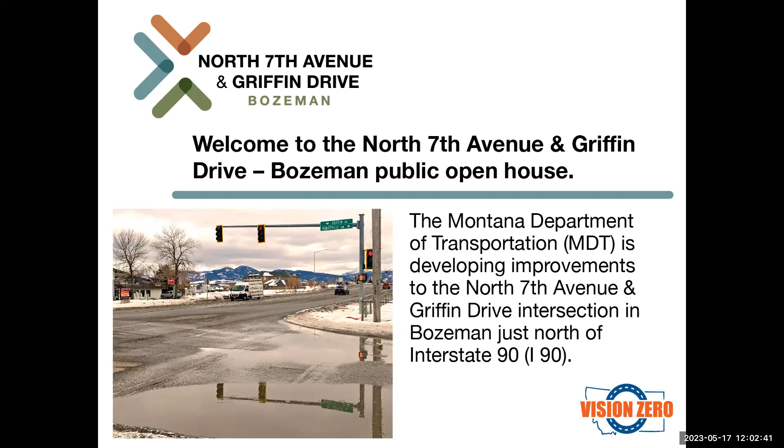Thank you. Hi, my name is Geno Liva, and I'm the Butte District Administrator for MDT. MDT's mission is to plan, build, operate, and maintain a safe and resilient transportation infrastructure to move Montana forward. MDT is looking forward to seeing the benefits provided by the North 7th Avenue and Griffin Drive project to the city of Bozeman and area commuters. We thank you for your participation in today's presentation, a question and answer session, and appreciate your interest and engagement in this project. Before we begin our presentation, let's begin with a quick round of introductions with our project team members.

Dave Cunningham. Hi, everybody. I'm Dave Cunningham. I'm with the Montana Department of Transportation, and I am the Butte District Construction Engineer.

Paul Cogley. Hi, my name is Paul Cogley, and I'm a constructability reviewer for MDT.

Josh McKenzie. Hi, my name is Josh McKenzie. I'm the project manager for CK May Excavating, the contractor on the project.

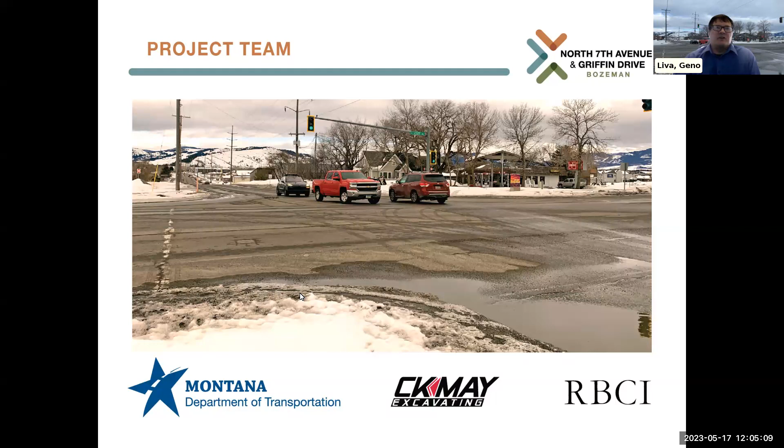Thanks, Geno. I appreciate that. The Montana Department of Transportation is making improvements to the busy intersection of North 7th Avenue and Griffin Drive, just north of Interstate 90 in Bozeman. The project includes reconstructing the intersection of North 7th Avenue, Griffin Drive, and Mandeville Lane. These improvements will reduce delays, improve traffic flow, and enhance safety features.

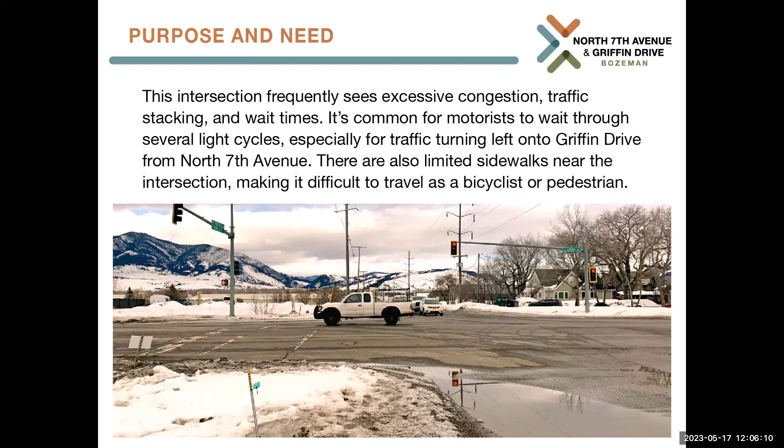In 2019, an average of 18,380 vehicles a day used this intersection. The intersection frequently sees excessive congestion, traffic stacking, and wait times. New turn lanes and other improvements will enhance traveler safety features while decreasing congestion and wait times. The project will also reduce long-term maintenance costs and improve pedestrian and bicycle mobility by adding sidewalks that connect to existing pathways.

Construction is anticipated to begin in early June 2023 and be substantially completed by later this fall. Reconstruction will involve adding new turn lanes, durable concrete pavement, ADA compliant sidewalks, bicycle accommodations, curb gutter and storm drainage, traffic signals and lighting. Additional work will include improving the approaches and relocating some utilities.

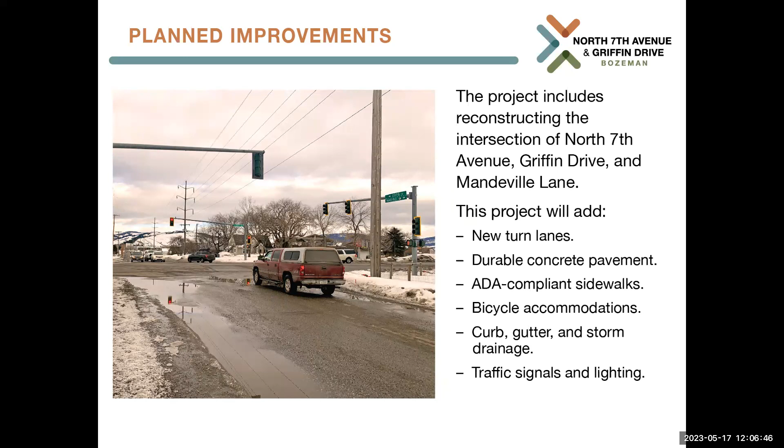A left turn lane will be added to North 7th Avenue in both north and southbound directions. A dual left turn lane will be installed for westbound traffic on Griffin Drive, turning south towards I-90. New turn lanes will help traffic move more efficiently and safely while increasing the capacity of this intersection.

Sidewalks have been planned according to the specific need of each leg of the intersection. Sidewalk will be added to both sides of North 7th Avenue, and a bike lane will be added on the east side of North 7th Avenue. The new facilities will extend to Wheat Drive and Nikles Drive.

A shared use path will be added on both sides of Griffin Drive. A 5-foot wide paved shoulder will be added to both sides of North 7th Avenue to accommodate bicycle or pedestrian traffic. On the east side of North 7th Avenue, a sidewalk will be added to connect to the existing sidewalk, and sidewalks will be added to both sides of Mandeville Lane to connect to the existing sidewalks. These additions will connect the existing pathways and sidewalks to improve mobility in the area for pedestrians and bicycles.

MDT has been communicating with city and county officials and area utilities to make certain these critical services will continue in the project area throughout construction. MDT has also met with emergency responders to ensure any potential emergencies in the area would be responded to in a safe and timely manner.

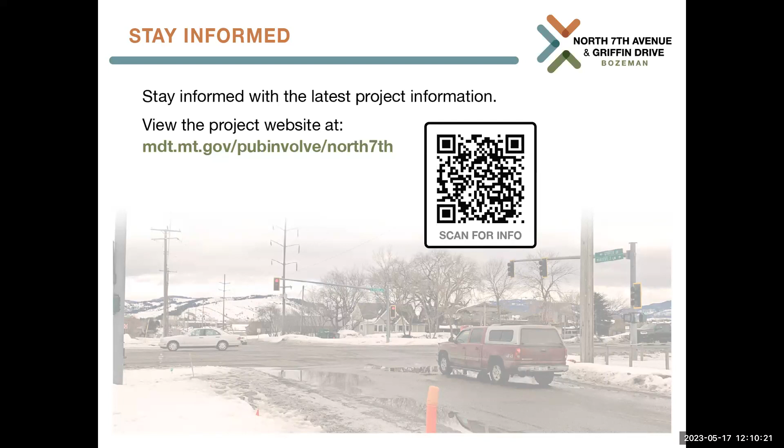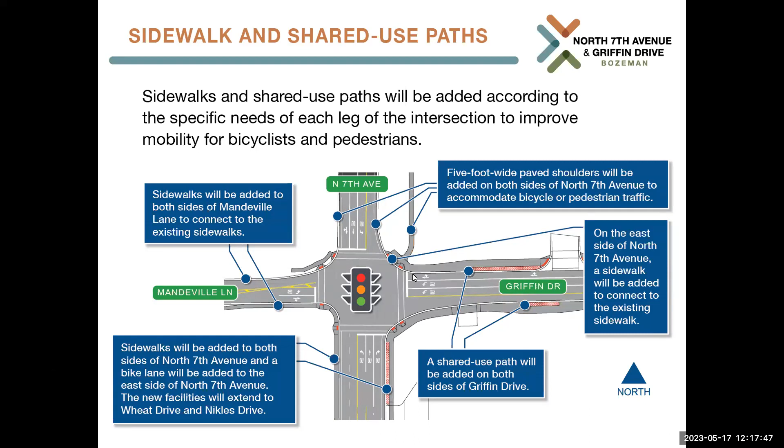Thank you, Dave. And Sandra, if that didn't answer your question, go ahead and resubmit your question if you have another area that you're looking at.

Another question coming in from DT: is this project an extension of the recent construction on Griffin, or was this conceived separately? Dave, I believe you're probably the person with the answers on this one. I wish I was. I'm not totally sure what the answer is on this one. We'll probably have to get back on that. I assume they were done separately, but I'm not totally sure.

This is Geno. They were developed separately. It wasn't developed as an extension of the other project. Great, thank you, Geno.

Don't see any other questions right now coming in, so we'll still hang out here for a minute and see if there's any follow-up questions from anybody.

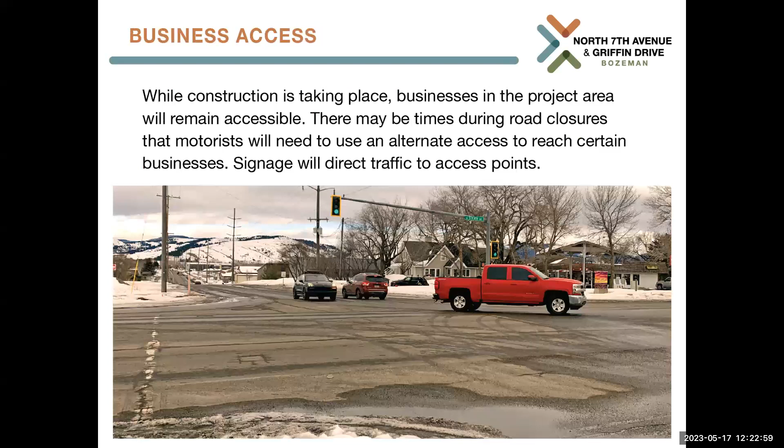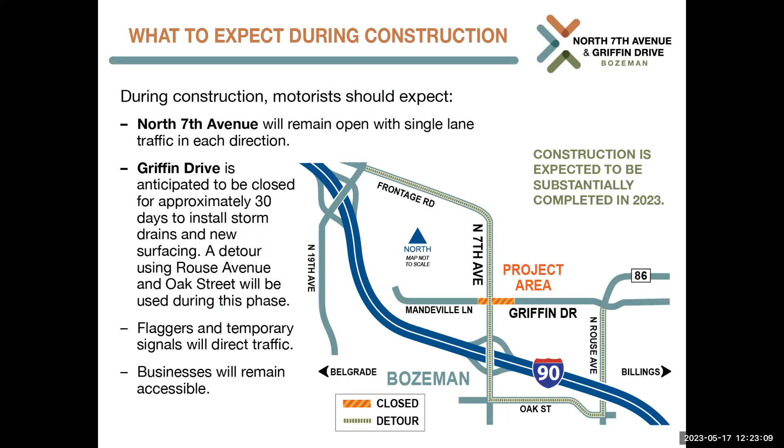Erwin, looks like you just got in on the Q&A and you're asking if there's a map. I'm assuming you mean a map of the project area. So the project area includes the intersection and part of Griffin Drive. This is the detour route that's being shown on the screen right now. So this is the general project area, and it goes up to Moss Lane, basically.

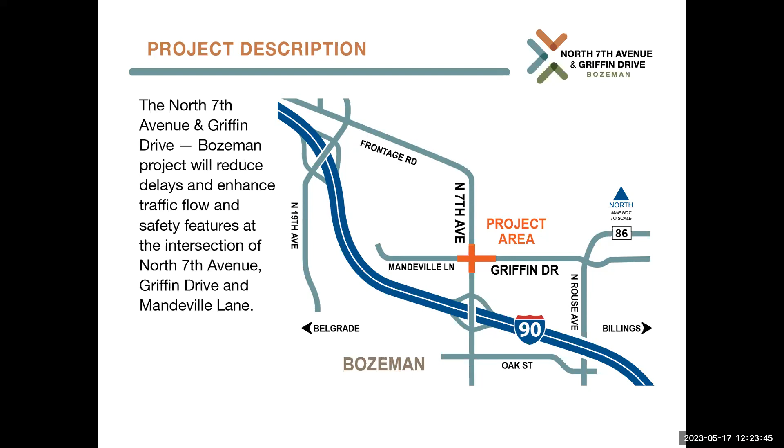This information is on the project website as well. If you want to go there, you can get the map off the project website. Let me know if you have any follow-up questions there. You're welcome, thanks for joining us.